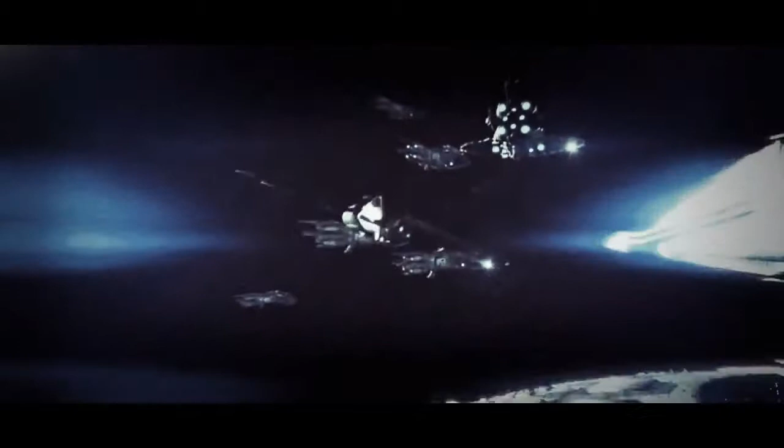Would you like to be able to see into the future? That is an intriguing question that has been contemplated time and time again throughout human history. Famous stories from the Oracle of Delphi all the way to the hysteria around the Mayan calendar in modern times have in some way dealt with the idea of humans seeing into the future. This idea has shaped popular culture and our science fiction with that one tantalizing idea of what if.

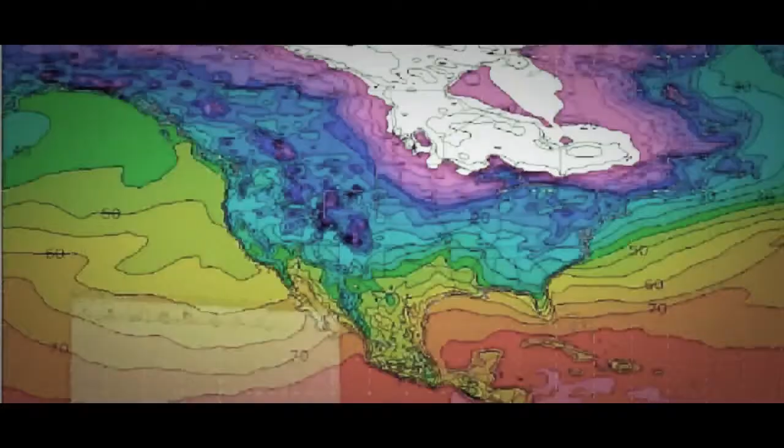In the real world, the answer to the question of can we see into the future has been answered with a resounding no. In our ever-evolving society, the trend today is to look toward the future by relying on predictive modeling to best predict the probability of an outcome. But we all know that even these well-thought-out predictions based on data often turn out to be not so predictable.

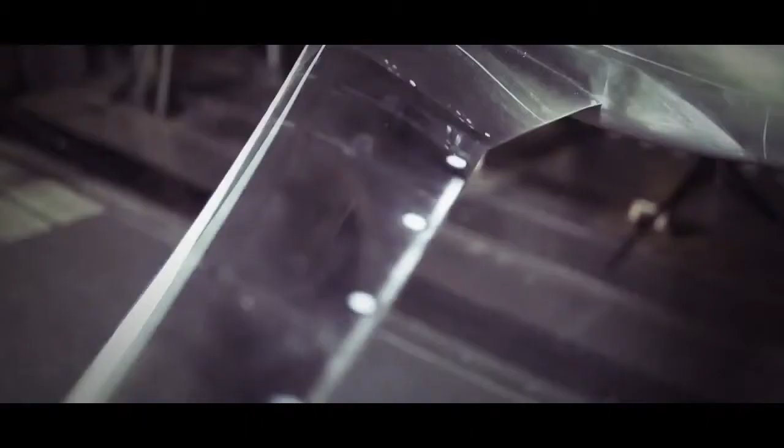Although it's clear that future events remain virtually unknowable, there is one group within NASA that comes as close as you can to seeing into the future. Throughout NASA's field centers, members of the Fixed Wing Project team are peering into the future every day and coming up with concepts that they believe will be on the next generation of aircraft. Because it takes years to plan and develop these concepts, the hardware and theories that are being tested today will be key components that enable the next generation of aircraft to take flight.

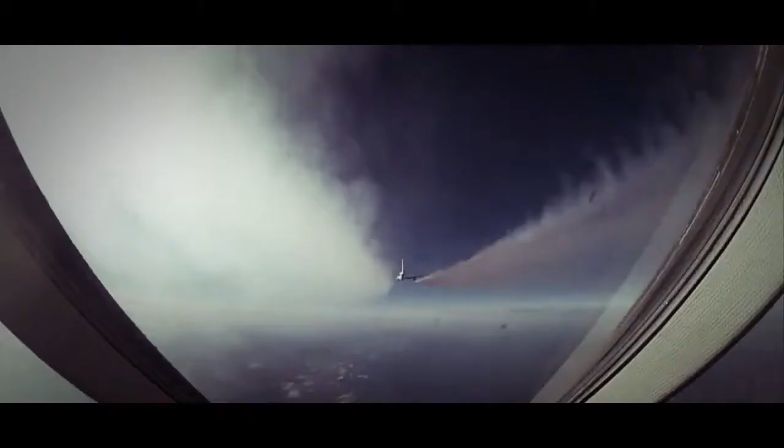On this episode of NASA X, follow us around the country as we visit members of the Fundamental Aeronautics Program's Fixed Wing Project, who are developing the framework that will shape how aircraft of the future will fly. Take a look behind the gates of NASA to see what some of these new ideas look like and how the engineers of NASA are paving the way for the ideas that will change the future of flight.

To the untrained eye, most of the aircraft of today look very similar. This is because over the past century of flight, aeronautical engineers have worked hard to optimize passenger aircraft to the point where they are as efficient and safe as possible. As a result, the basic tube and wing shape has been configured and examined from every possible angle, making it the most efficient design possible today.

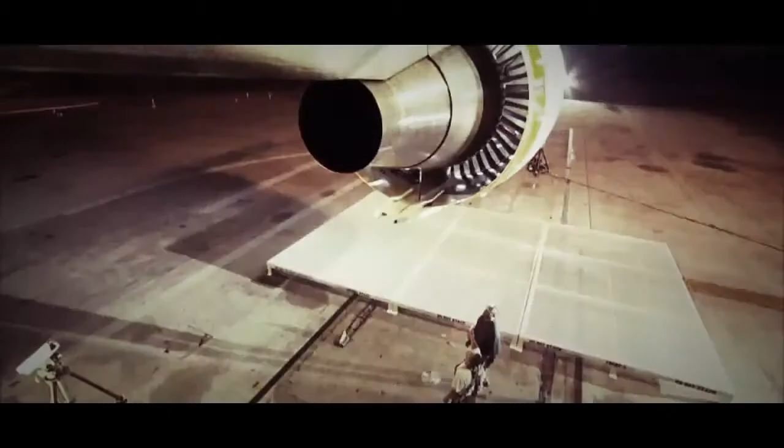Although aircraft have looked basically the same over the past few decades, if you look closely, you can see some of the major design changes. Wings that were once swept back more dramatically now are less so because of advances in aerodynamic shaping. Engines that spewed emissions by the ton are now much more efficient. Materials that were once so heavy that they significantly weighed down a craft are now much lighter and stronger.

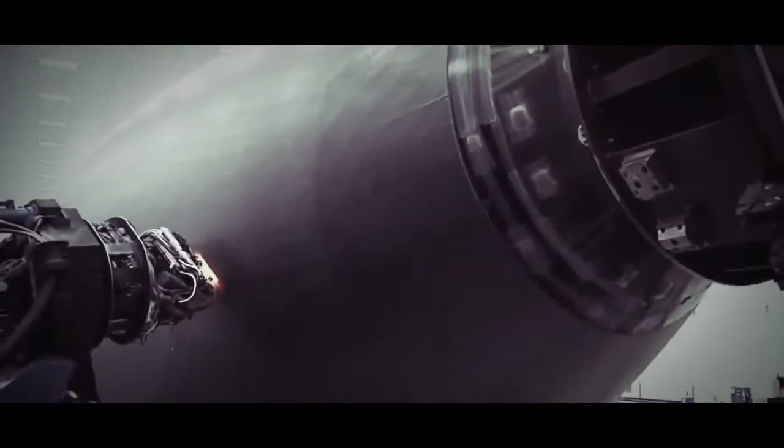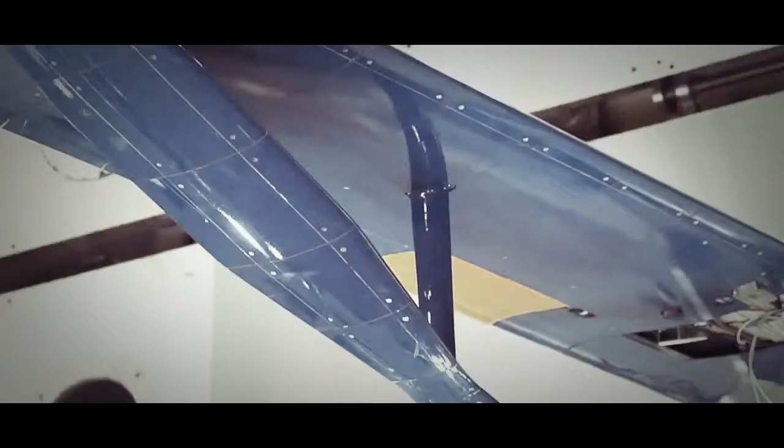With all this improvement and efficiency, it is fair to ask if there is anything else that can be done to make flight even better. The answer is of course yes. Behind the gates of NASA, there are scores of researchers who know that we can still make aircraft better because they are working toward these long-term goals every day. Some of these researchers from the Fixed Wing Project are working on so-called N+3 configurations and goals.

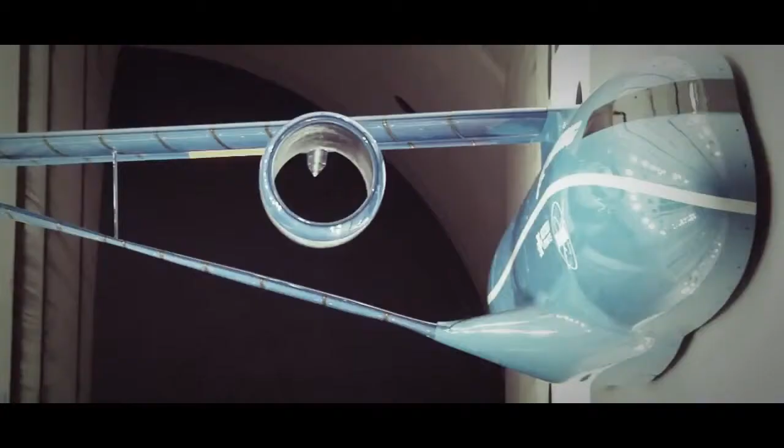In mathematical terms, the letter N is where you start now. N+1 is the next step. N+2 is just beyond that, and so on. Here in the Fixed Wing Project, N+3 equates to aircraft that will be flying in around the 2030-2035 timeframe. For this team, everything is on the table, including engines, fuels, wings, and fuselage shapes.

Well, we need to remember the first A in NASA is aeronautics. So it's a National Aeronautics and Space Administration. Aeronautics is the field of research for airplanes. The airplanes that fly today were researched and experimented with within NASA many years ago. So we're trying to continue that tradition, that important work that we have done for the nation and the world, for 20, 30 years from now.

Fixed Wing is a NASA research program in which we are doing activities to try to improve the airplanes that we're going to be flying in the future. We're trying to make them less noisy. We're trying to make them better for the environment. We're trying to make them in a fashion that they will use less fuel.

The research we're doing is important because air travel is such an important part of your life. People travel, and even if you don't travel, cargo gets carried every single day. You use something every single day that gets carried by an aircraft. It's part of our way of life these days, and it often gets taken for granted. There are challenges though, so we are focused on exploring and developing technologies and concepts to improve the energy efficiency and environmental compatibility of transport aircraft.

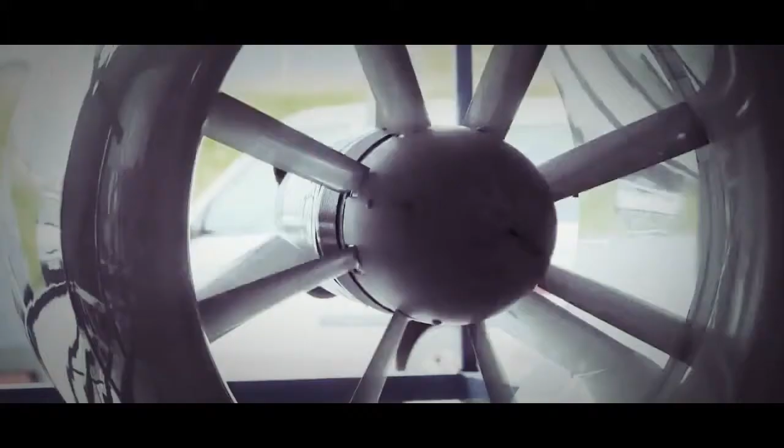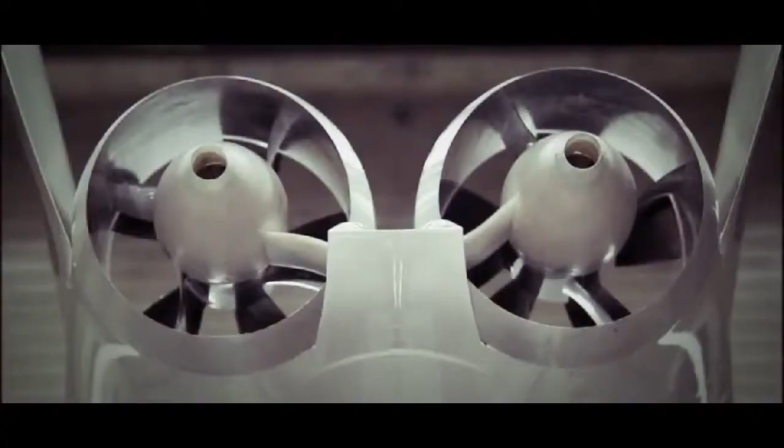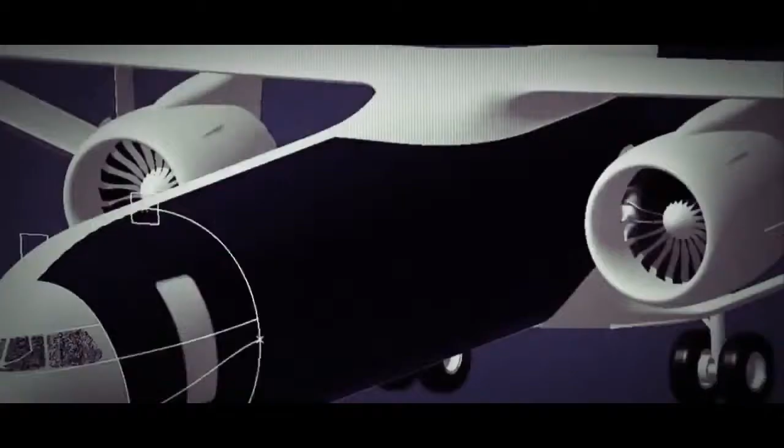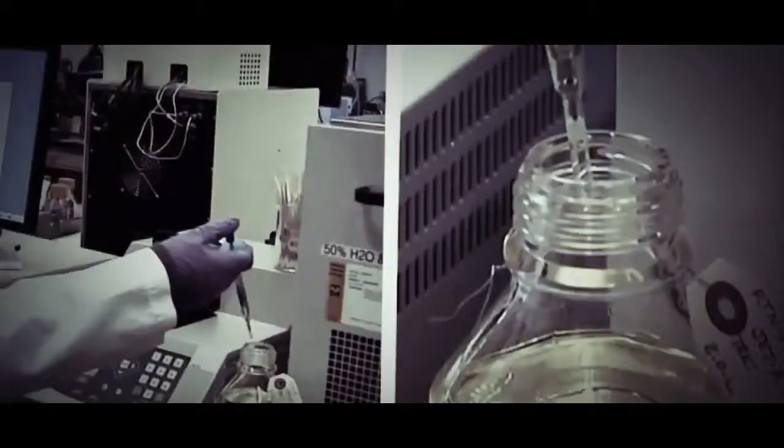With this mandate to significantly lower noise and emissions and increase performance for subsonic aircraft, there will be a need to address virtually every aspect of the current aircraft configuration, including developing new materials and engines, testing alternative fuels, and even changing the fundamental shape of the aircraft. All across the country, fixed-wing researchers are doing just that. Major advancements are being made into the understanding of how future aircraft will fly. Because there are so many areas of study, let's first look at something that has the potential to be used today as well as in the 2030 timeframe: alternative fuels.

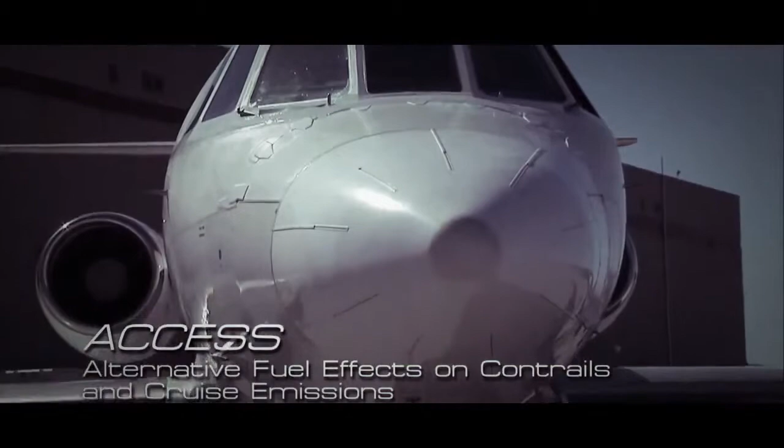On this beautiful morning at NASA Dryden in California's high desert, a test called ACCESS, or the Alternative Fuel Effects on Contrails and Cruise Emissions test, was performed to study the effects of alternate biofuel on engine performance, emissions, and aircraft-generated contrails at altitude. For this test, 2 aircraft were flown in tandem. The first is NASA's DC-8, which will be burning an alternative fuel.

The second aircraft is NASA's Falcon that will fly directly behind the DC-8 to measure and characterize the emissions coming out of the engines from the alternative fuel. Here is NASA's Bruce Anderson to explain. NASA's role is in assessing the combustion characteristics of alternative fuels, as well as determining how these fuels will affect the performance and emissions from aircraft.

To understand how aircraft affect the climate, we need to make measurements at cruise altitudes. So the focus of ACCESS, or the alternative fuel effects on contrails and cruise emissions, was to fly behind the DC-8 in flight and look at its emission and contrail characteristics as we changed from standard jet fuel to a fuel that was a blend of a fuel that was made from camelina plant oil, and also added 50% of Jet A to that.

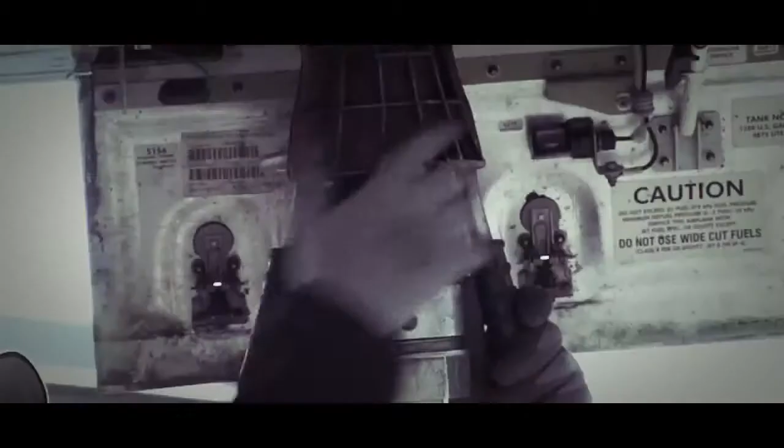The fundamental thing is the aircraft has to retain its performance characteristics when you burn a fuel. You can't have any drop in power. The fuel also has to have similar characteristics in terms of density and volume to kerosene. So what we're looking at is drop-in fuels. A lot of the fuel systems on the aircraft are designed to rely on the aromatics in the fossil fuels to swell the seals to make them leak tight.

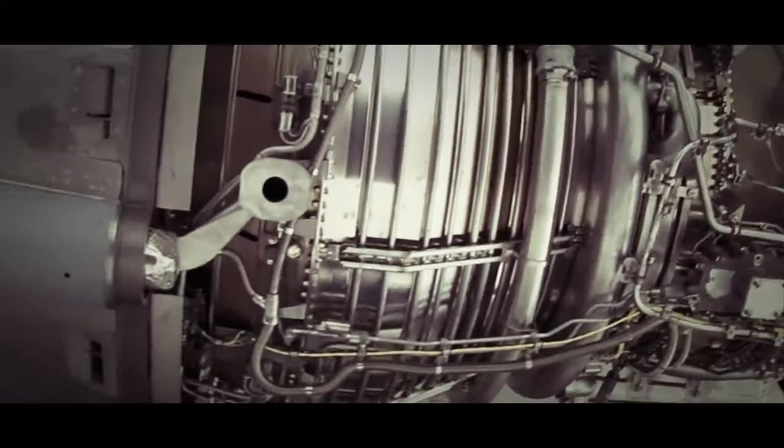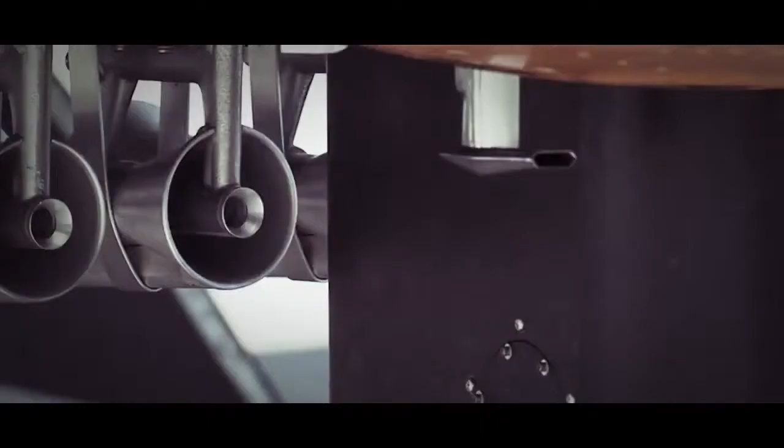So when we fly an alternative fuel, we have to mix it with standard fuel to retain those properties. Otherwise, the fuel would just leak out of the aircraft. And then the second thing we're looking at is just the emission characteristics. By that I mean the amount of pollutant generated per kilogram of fuel burn.

After the first few flights, it was shown that using these types of alternative fuels could significantly reduce emissions at cruise altitudes, particularly soot emissions. Work continues to better understand how to use these fuels and how to make them even more efficient for future aircraft.

Other than alternative fuels, there are some other ideas out there for finding more efficient ways to power aircraft. If we look on our roads today, many of the cars that are now being driven run on a combination of fuel and electricity. The idea that aircraft could do this seemed far-fetched only a few short years ago, but today, this idea is gaining traction. There are several ideas on how to do this, so let's take a look at a few.

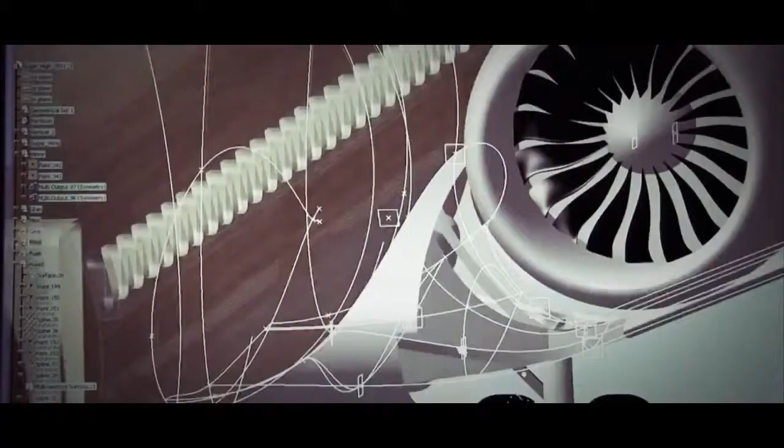Here, a team is looking over a new Boeing aircraft design called Sugar Volt. This unique design has several interesting changes, like the truss-braced wings that have the potential to reduce the drag of the wings by making them longer and thinner. Because thin, long wings have the tendency to flex more, designers have included a clever, efficient truss structure to support them. This design has the potential to reduce drag and weight, thereby making the craft more efficient to operate.

At first glance, those unique structural changes may look like the biggest game changer for this type of aircraft, but the Sugar concept holds another surprise as well. In the case of the Sugar concept, what's less obvious to the eye when you see it is that it has an unconventional propulsion system. It's a hybrid gas-electric concept that's closer to what you see in a Prius. It has batteries and a gas turbine engine technology.

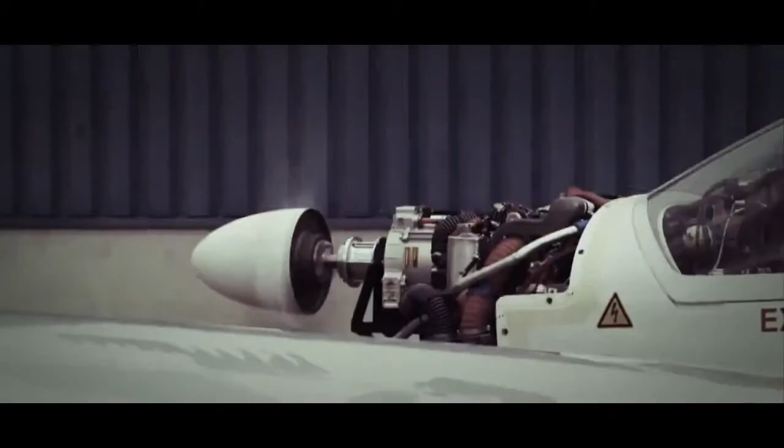It requires advances to battery technology, but those are happening throughout the world independent of the aerospace industry, and we're trying to leverage that. We do it on cars, we should be able to do it on airplanes eventually. The challenge is to take those batteries and have enough energy or power content and have them be lightweight. Where we are today, I think, is we're at the dawn of the age where we can start to see electric propulsion or hybrid electric propulsion.

And you'll see it on smaller aircraft first before you see it on the large commercial transports. But that's what we're working towards. It's good for cleanliness, it's good for noise, it's good for energy efficiency. It has its challenges. That's why we're working on it, and that's why it's not being done today.

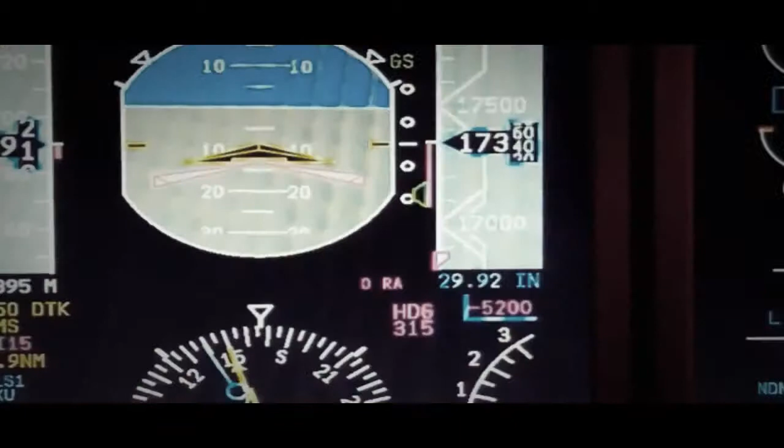The idea behind this vehicle is to have its twin engines burn fuel when great power is needed, like at takeoff. But when the craft is in a cruise configuration, a switch can be made over to a battery electric mode to supplement or even replace power to the engines. If successful, this could reduce the amount of fuel burn by up to 70%.

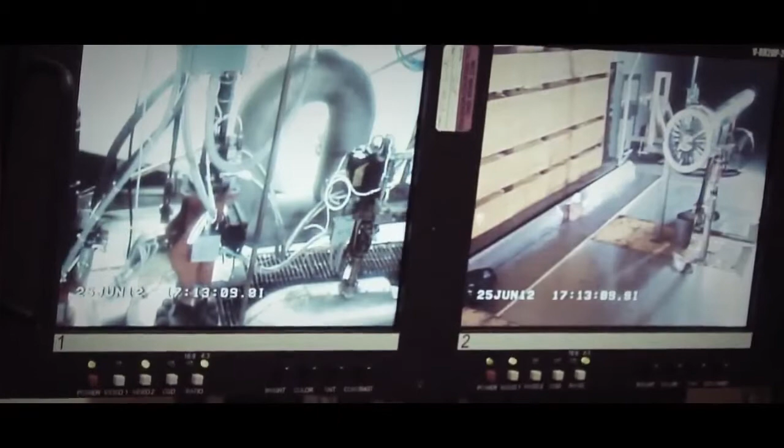Another concept called turbo-electric propulsion is being studied here at the NASA Glenn Research Center. Here is NASA's Jerry Brown to explain. There's not been electric airplanes except in very small size. And the reason is that electric motors and generators tend to be too heavy for flight. We're hoping to change that, and we're hoping to get a benefit from saving a whole lot of fuel in the process. The type of electric propulsion that we're talking about today is turbo-electric propulsion.

We're going to keep the turbine engine because it's really good as far as a lot of power in a small power plant. And then we're going to use its power to drive a generator, send electricity to motors that drive fans that do the propulsion. This concept will look very different from vehicles of today as well. Potential designs include 2 large turbine engines on the wingtips that will drive 2 large generators inside the body. The generators will in turn power a number of fans, providing the propulsion the aircraft needs to fly.

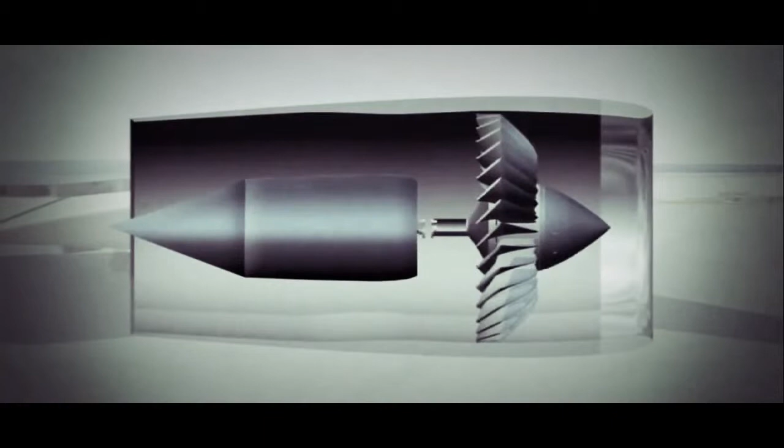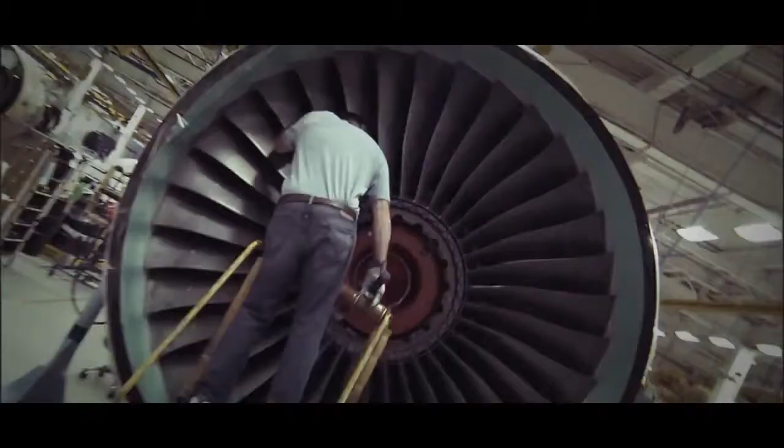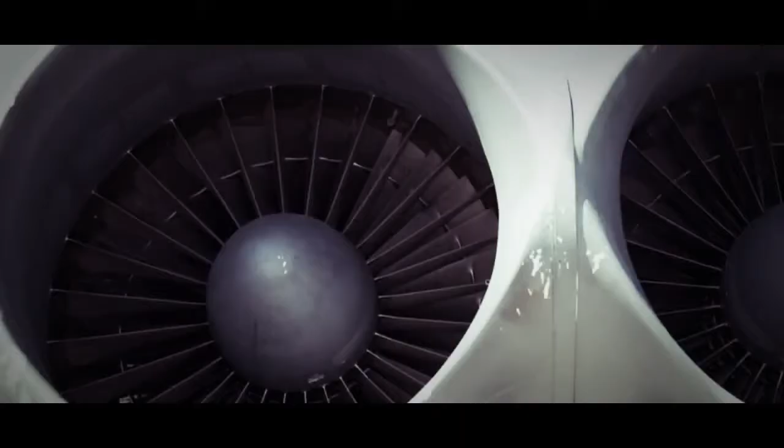What we want to do here is we want to be able to break the turbine engine from the fan, and that gives the aircraft designer a lot of freedom. If he can move the turbine engine somewhere else in the airplane, that may itself have advantages. The engine and the fans don't have to turn at the same speed. You don't even have to have the same number of fans. And that's what we're really looking for, is we want to have an array of a whole bunch of fans, maybe 15 of them, say, and just 2 engines. You like to keep just 2 big engines because the big engine is much more efficient.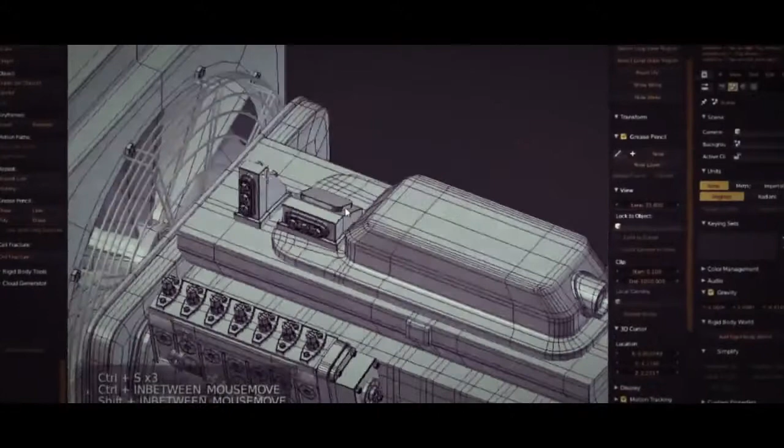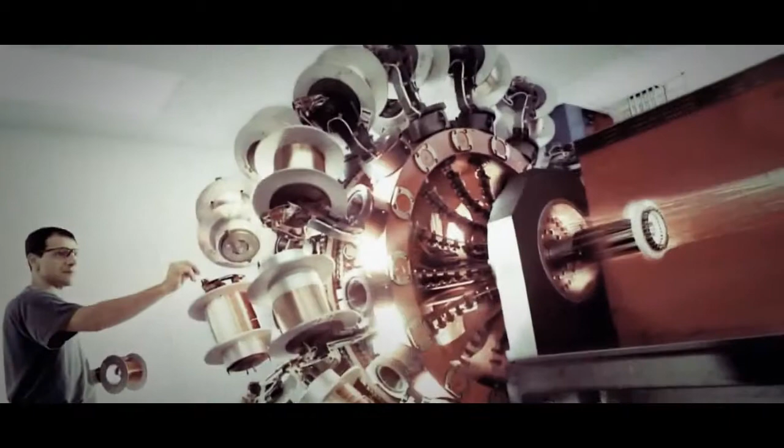This idea is intriguing, but big changes need to be made to make it viable. One major challenge is the need to reduce the size of the generators, because the generators of today are way too big to fit on an aircraft. One idea that the NASA team is looking at is a way to remove the current type of copper windings in the generator and replace it with superconducting material. This change would allow the generators to shrink, making them viable to fit on future aircraft.

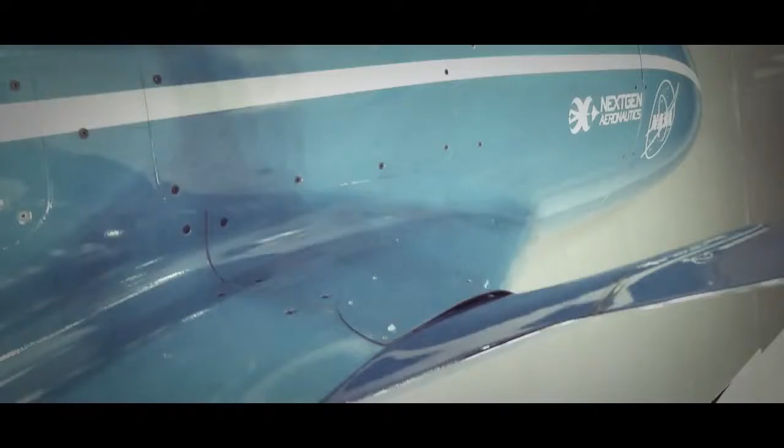As we've seen so far, new aircraft designs are coming online that have the potential to greatly improve aircraft efficiency. Another of these revolutionary designs has come out of a joint MIT and NASA study. This unique design is called the double bubble and has the potential to reduce fuel burn by up to 70% as well. So the MIT D8 double bubble design was something that we've been working with MIT on for a number of years. The idea there is to take some of the lift that you would normally get from the wings and try and move that to the fuselage.

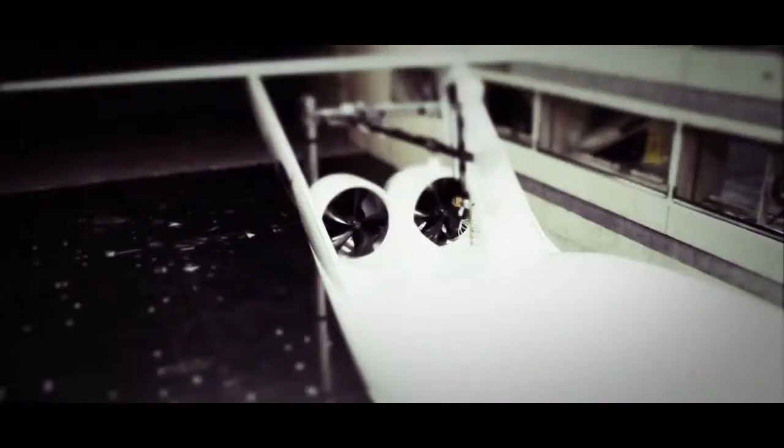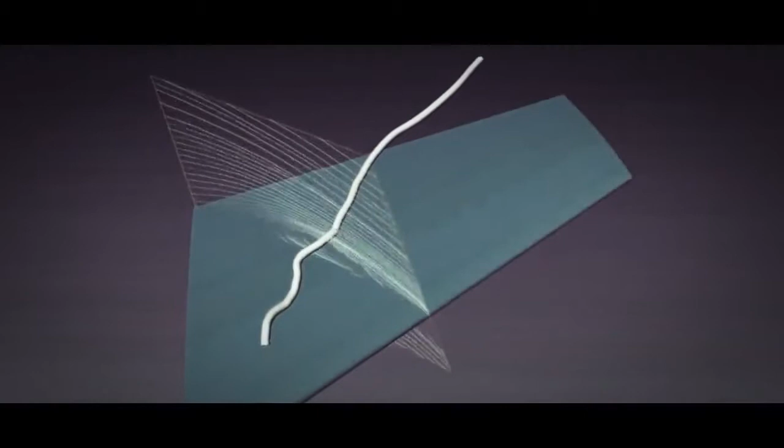The image in the middle, on the other hand, the engines have been moved to inside that pi tail configuration. And by doing that, we actually get some benefits. If you can use the engines to refill that area of dead air behind the plane, you have a chance at being more efficient in terms of propulsion for that vehicle given a certain amount of fuel. We're trying to sort of push the envelope, see what is the maximum benefit that could be obtained by this kind of a configuration to understand what's really possible in terms of fuel savings. Aiding much of the work is improved computational fluid dynamics and wind tunnel testing. Right here in this building, we have the Pleiades supercomputer, which is one of the largest supercomputers in the US and in the world.

It has 200,000 processors working on the problem if you use the whole machine on one problem. So it's a very large machine, and we need that very large machine because we need to do very big problems here at NASA. The aeronautics research directorate is using it to try and simulate the flow over these N+3 configurations.

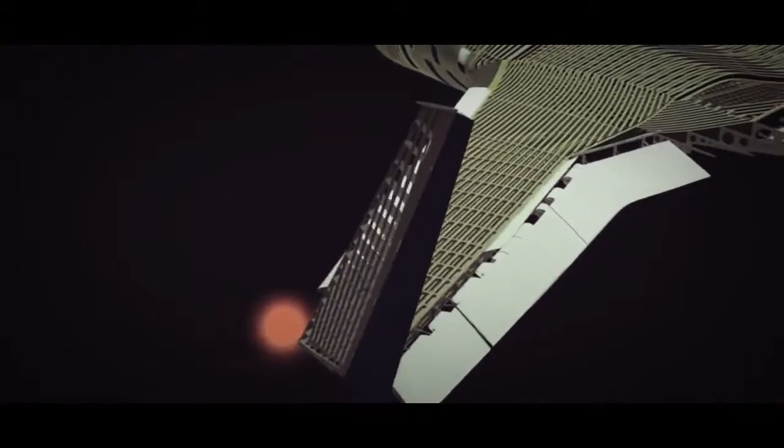In order to capture all the detail you'd see on a vehicle like this, including what's going on inside the combustors of the engines and things like that, you need to have a lot of grid points to resolve all the fluid motion inside those engines over the airplane, and having that many grid points to resolve all that physics in 3 dimensions creates very large computational grids that require very big machines to advance the equations that govern the fluid motion and get these CFD, computational fluid dynamics solutions that we use to make our assessments.

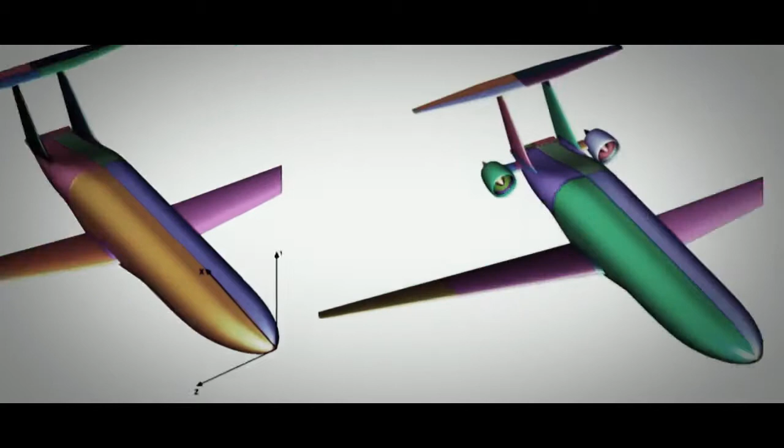Aerodynamicists of today are able to model ideas on computers, which allows them to test many different configurations before a wind tunnel model is ever built. Once a design is agreed upon, a wind tunnel model can then be fabricated and tested. This process was used for the double bubble as well, but the wind tunnel test showed surprising results.

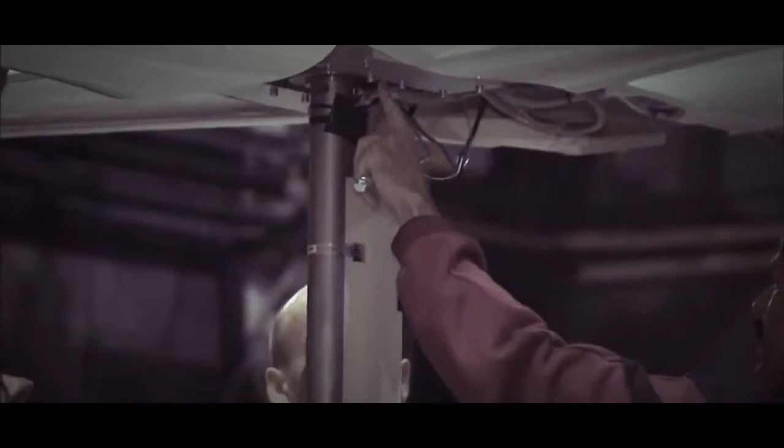The good news is that we've just completed the first test of this configuration in the Langley 14x22 wind tunnel at NASA Langley. And it showed even a greater reduction, or more fuel efficiency benefit to this technology than we had predicted on paper with our low-order models. So we're trying to digest the experimental data that show this nice benefit in fuel efficiency from this configuration.

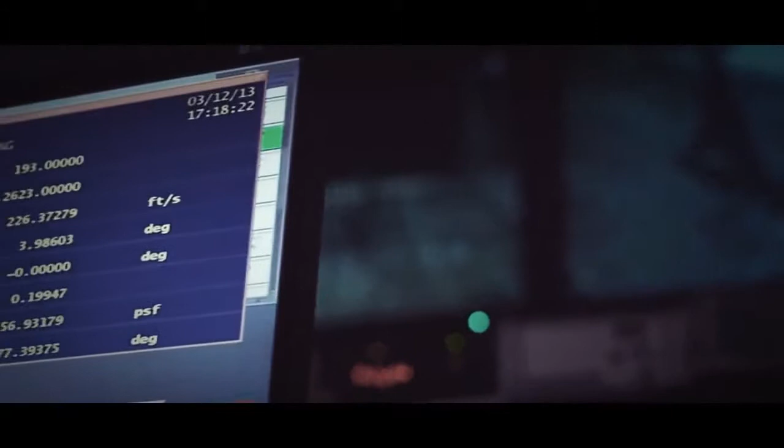At the same time, we're also using the supercomputer here at NASA Ames, the Pleiades supercomputer, to do computational fluid dynamics, CFD runs of these same configurations and see if we can confirm that benefit on the computational side as well. Testing will continue on the double bubble, and if the results hold, you may see this type of aircraft at an airport near you in the future.

When testing aircraft, many different stages occur. We have already mentioned CFD and wind tunnel testing, but another tool in testing future designs is to build a flying scale model. Although CFD and wind tunnel modeling is the mainstay, often test flights of these small, scaled-down versions of an aircraft offer some of the most dramatic results for researchers. That is the case with this aircraft, called the X-56.

This aircraft is being used as a test bed to understand how different wing configurations work and how a unique idea called active control may be used in the future. The whole concept behind the X-56 is that they've long known that a very long wingspan vehicle is more efficient than short wingspan vehicles. Problem is though, when you get a very long wingspan, you start to get into issues with flutter modes that start to creep into the vehicle, so that the wing will go unstable and in extreme cases will rip off the vehicle. To get around that problem, you can use active flight controls to suppress those flutter modes.

Active control is you put things like accelerometers within the wing, and as soon as you sense that the wing is starting to get into these flutter modes, you use the control surfaces behind the wing to damp that out. So the airplane, as it's flying, is continually fighting these modes and keeping the wing straight and stiff. Then you can build a lighter, longer wingspan vehicle that is more efficient.